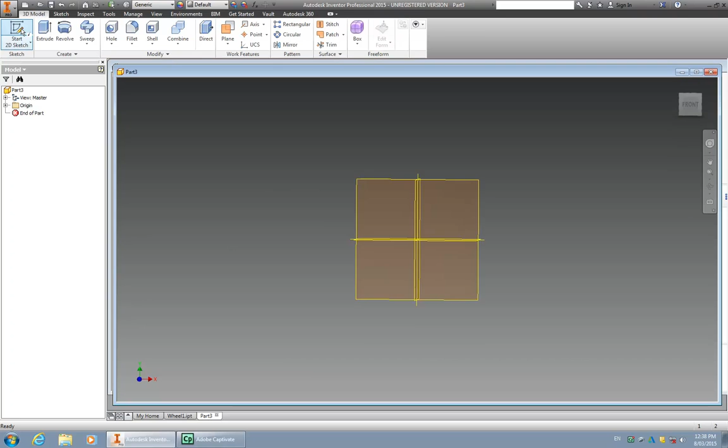Okay, so we're back to a 3D model, and we're going to start a sketch to create a cube. Let's select a plane. I'm selecting this plane with my left mouse button clicking. We're now going to create a rectangle.

I'm going to use this feature of the rectangle. It's a 2-point center, which means you click on the center, that one there, and drag out, and we have a rectangular prism. Now one side is already highlighted.

I'm going to make that 50mm, and the other side, I'm going to click on it here. I also want it to be 50mm, so left mouse button clicked on both of those and hit enter. Now we've got a cube, 50mm cubed.

I'm going to hit the zoom button to shrink it in so it fits the page, and there it is, fully constrained from the origin.

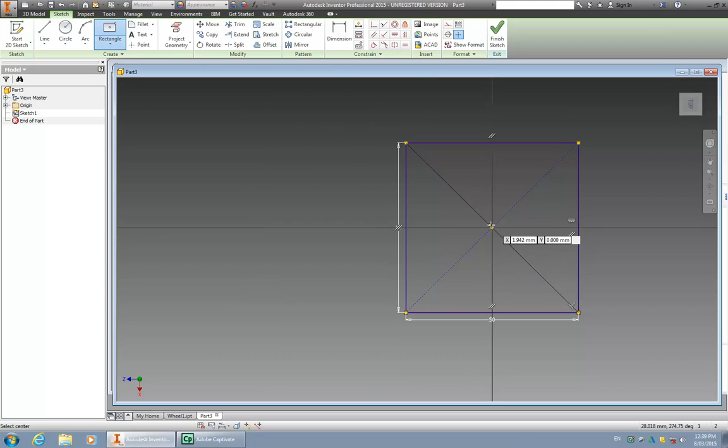Okay, I'm going to finish that sketch, and now I'm going to extrude this feature by left clicking. The extrude window opens, and I'm going to extrude rather than from one surface or another.

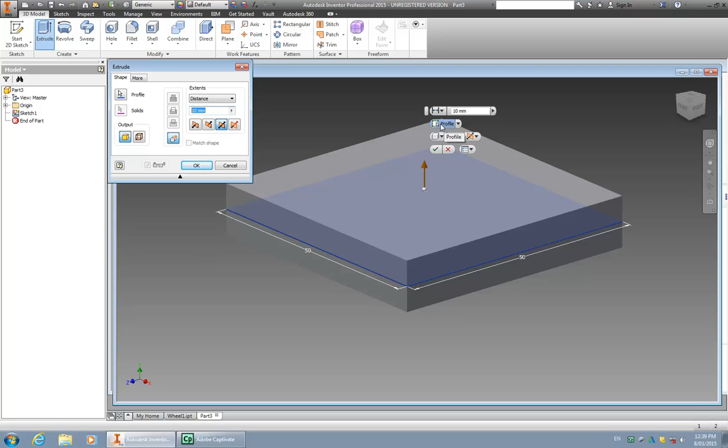I'm going to extrude from the center plane onto both sides, and of course since it's a cube I want it to be 50mm, so I'll click up here, or I can use this quick reference dialog box as well and make it 50mm, and there it is. I'm okay with that, and I've got my 50mm cube, sitting there nicely.

If I wanted to click the view cube and move it around, I could do so. Look at it from the right or the front, however I wanted.

Okay, next thing is to make my center holes. I'm going to click the hole function and choose to have linear placement, or I can click from sketch, concentric, or on a point. We'll just use linear at the moment, and I'm going to choose this face.

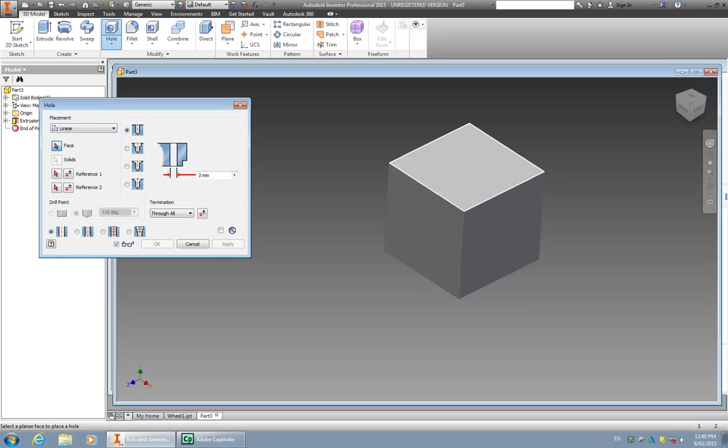Notice that my cursor has a crosshairs on it, so it doesn't really matter. I'm going to pick a spot. I don't have to try near the center as a location. I'll click it there, and Inventor gives me an existing hole all the way through.

I can change now the diameter of the hole up here very easily. I'll make it 10mm, which is what I want, and it's going to be a 10mm hole.

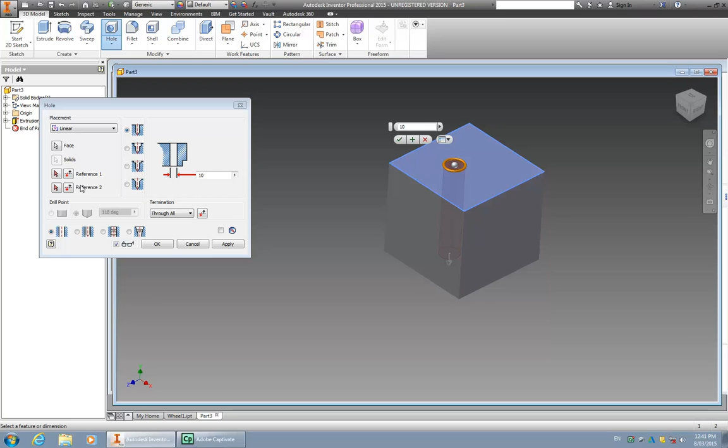Now on the left hand side here, more information is available. This reference 1 and reference 2 relates to locating that hole with respect to the object that it's going through. So I'm going to click reference 1 arrow and then select an edge. That means that I can now specify how far away from that edge I want the center of the hole to be.

I want it to be 25mm. Now don't hit enter yet. Click reference 2 and select that reference, because if you hit enter, you'll see why.

When you hit enter, you'll lose your dialog box. You'll have to regain it again, and I should do that actually to show you guys what happens. So I'll click 25 - it's already guessed it's 25, so I'm going to hit enter.

So now let's suppose that hole's in the wrong spot and I want to edit it. Go across here to the model tree.

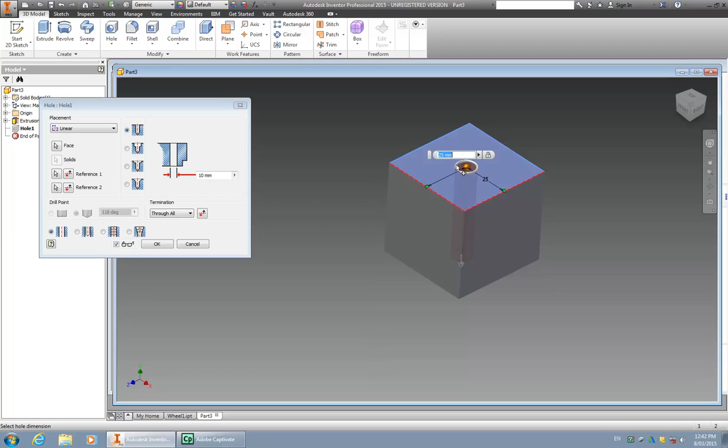Notice as I highlight and run my cursor over, each section of what I've created highlights. So this is a record, the model tree, or I think it's called the browser in Inventor. If you right click on that, you can edit the feature, left click on edit feature, and you're back to your dialog box where you can change all the different parts as you need to.

Okay, but we're happy with that, so we're going to leave it at 25. Okay, next hole. So I'm going to select a face and start a 2D sketch.

This time I'm oriented towards that sketch, which is fine. I was going to create it one way, but actually I don't want to do it like that. Oh, I can do it differently. I'll do it this way. This time I'm going to do a circle.

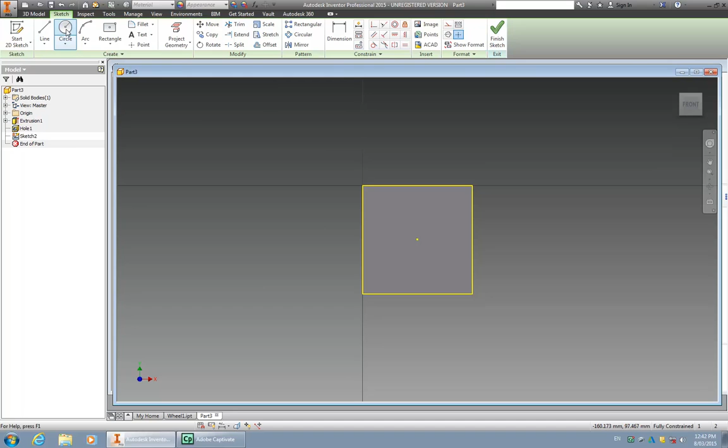So I'm not using the hole function, I've got a center point here to run off. I'll create my circle, and I'll make it 10mm, and hit enter. There's my 10mm sketch. I'm going to finish that sketch, and this time use the extrude function,

to create the hole. I wanted to remove material, so I'm selecting this center box over here, and the distance, how far does that remove? I want to go all the way through. I could go to the next instance, next object, or between two faces, but I'm going to go all. So we've got the all function and remove material.

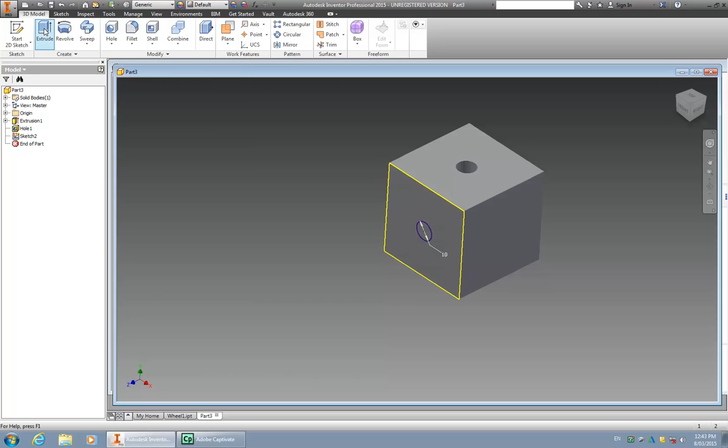I've got to select the sketch, of course, so I should really do that first. If you find yourself in that position where you think, gee, what's going on here, the grayed out OK section doesn't work, click cancel, and when you hit the extrude button, the first thing you should do is select what item you want to extrude.

Now I'm going to select that little area that's now light grey inside there, and out comes the extruded feature. I don't want it to go that way, I want it to go the opposite way, so I can use this button down here to reverse that section if I want to go this way, in which case it's going to remove material.

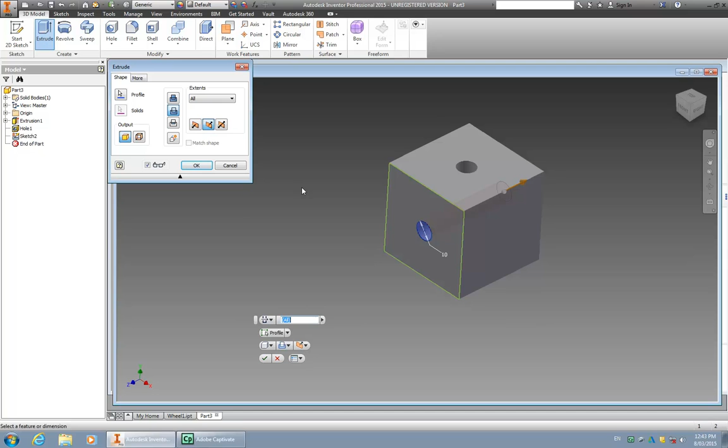I've selected remove material over here, and I can select the distance or just make it go all the way through. So I go all the way through, that suits me fine. And I check OK, and there's my second hole. Now to make the third hole and the final hole, which I want to have holes on every face,

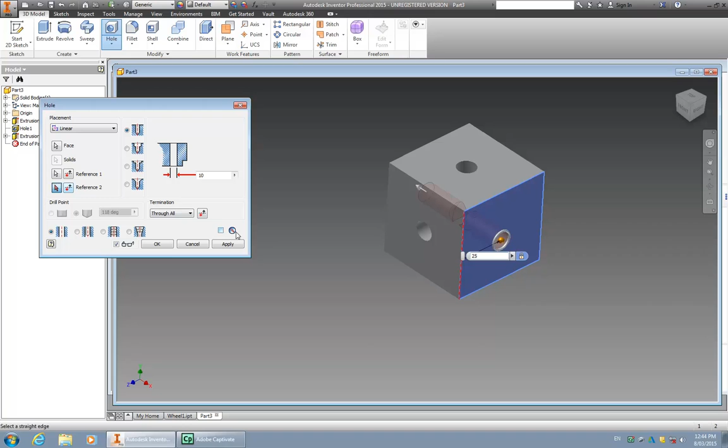I'm going to use the hole feature again, and this time select this face, do the same sort of thing. 10mm is still the standard size, it's already entered there for me. Reference 1, I'll click that. It's 24 point something, I want it to be 25, and then reference 2 over here, select another edge, make it 25.

And it's now fully located where I want it to be. I hit apply, and there's my cube. Cancel out of there. So now I have my cube, I'll spin it around to give you guys a bit of a look at my holes, 10mm holes all the way through the center.

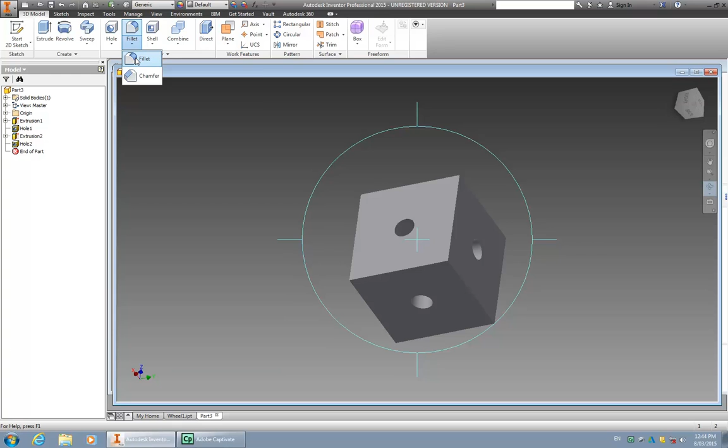Okay, next thing I'd like to do is round the edges of this cube. So I'm going to use the fillet function, which will put a round on a 2D or 3D plane, as you can see. I click the fillet function, and I can select up here the quick reference. I'm going to make a radius of 5mm.

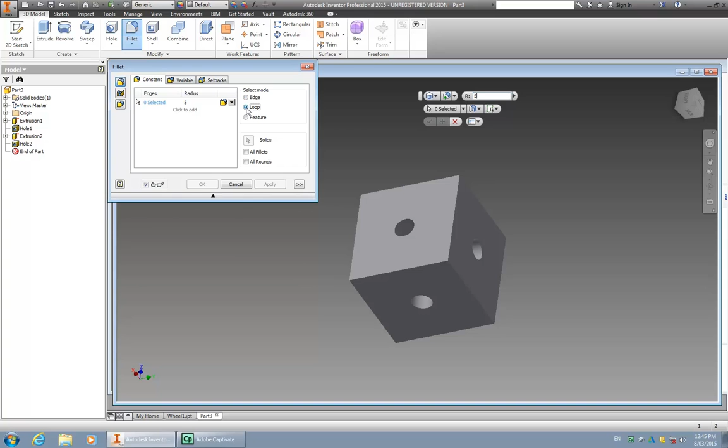So I'll hit 5mm there, and then I'm going to choose what kind, I want to do a loop. That means that when I select an edge, Inventor won't just put the fillet on one edge, it'll do it on all the connected edges. So I'll left click there, and there's my 5mm fillet. I'll do the same on the other side.

On this edge over here, I can reach through the back by hovering over it there, and lastly down the bottom, I think I might have covered it all. Let's have a quick look. The spin center here, no, one more there.

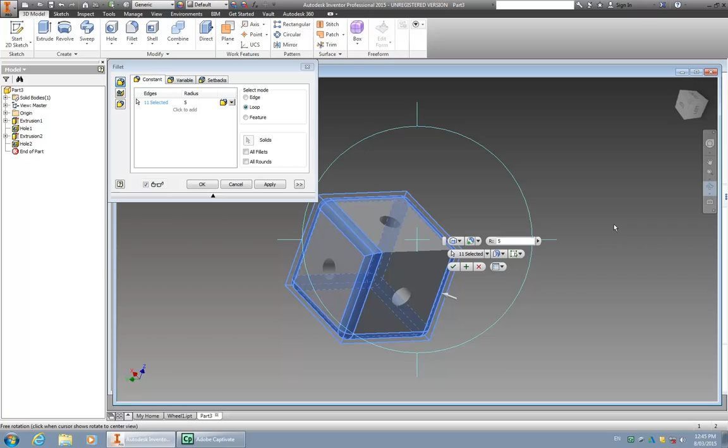So I want to escape out of the spin center and click here for my final loop. So I've got my fillet all the way around. It's a 5mm fillet. I click OK, and there it is.

So I can show you my nice cube. That's how to create your cube. Create one of those. You can render them easily up here using materials and colors, and you can pick a material if you like. At the moment it's set on generic, but I could choose anything I like.

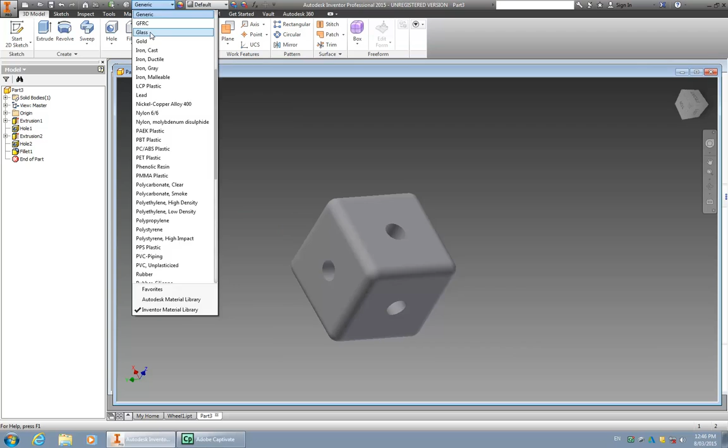I'm going to choose glass for the moment. Now you see it's become translucent, and the appearance is clear, but let's just say I wanted to make it something a little bit more interesting, clear yellow with a yellow tint. So there I've got my yellow tinted cube, looking pretty good, and I think that'll about finish this tutorial.

So create yourself a cube. You don't have to use glass, of course, you can use any feature you want. Try not to use dark features because they do hide the detail behind.